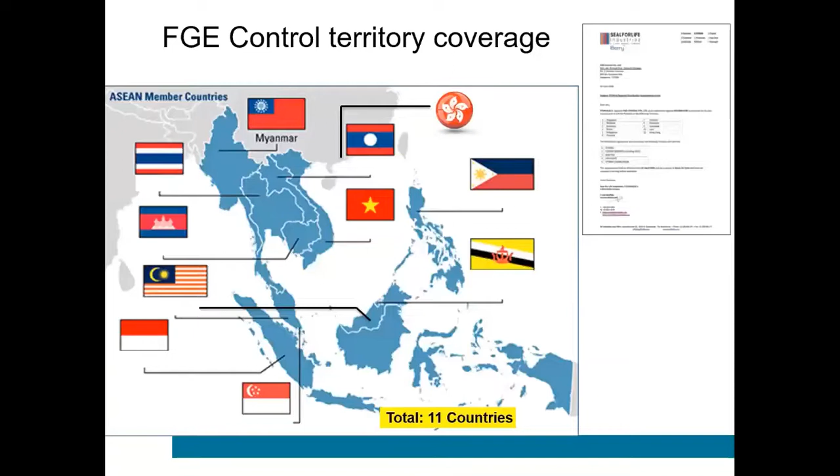So I'm based in Singapore. I used to work for STOPAQ in Europe for about 8 years, and for the past 2 years I've been based in Singapore to look after the Southeast Asia region. These countries therefore also include the Philippines, and we represent STOPAQ as a master distributor for the Southeast Asia region.

STOPAQ itself is part of a bigger company from the US called Seal for Life Industries. This company is fully focused on corrosion protection. They have different types of technologies, for example Polyken, which are 2-ply and 3-ply tapes. They have Covalence, which is the former Raychem heat shrink sleeves. They have Anode Flex, which is linear cathodic protection, and Powercrete, which are liquid epoxies. STOPAQ is part of that.

And now with the new acquisition, you guys are also representing Oxifree, which was purchased at the beginning of this year. But these 5 are the original companies under the umbrella of Seal for Life.

By the way, can we ask questions during your presentation, or should we do this at the end? No, absolutely, you can ask whenever you want. That goes for everyone.

So with regards to all the concerns, actually, I don't know if you still remember me. I've had a meeting with you before at an event in the States, in Texas, with the STOPAQ group of companies, maybe about 4 or 5 years ago. I don't remember, that's quite long ago.

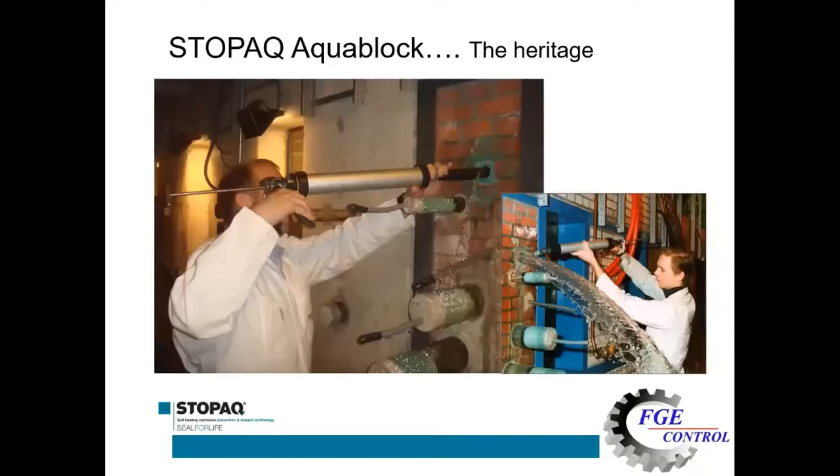STOPAQ stands for Stop Aqua. Why? Because Holland, the country where I'm from and where the technology is from, is actually below sea level. 60% of the country is below sea level, which means we have a lot of water ingress and water problems. So we had to learn to live with a high water table and make sure our buildings are sealed off. This is one of the things Holland is famous for, all the dikes and waterworks we have. STOPAQ in the 80s and 90s was actually a sealing, waterproofing company, and we started with cable duct sealing, which we do for example for telecom cables running through buildings.

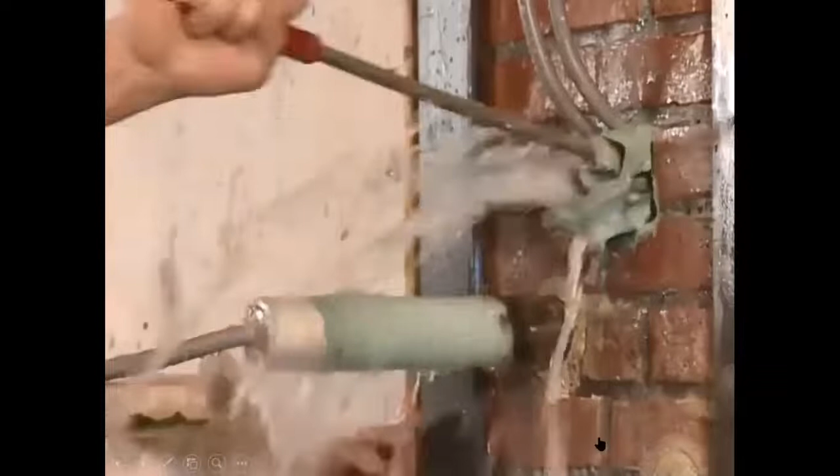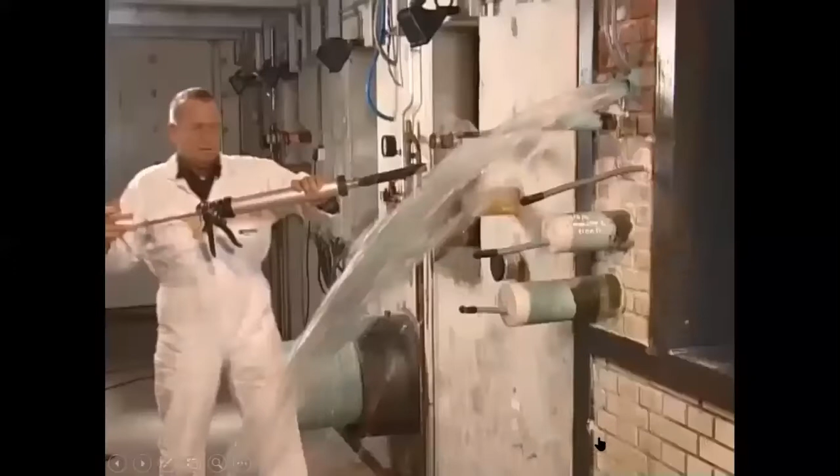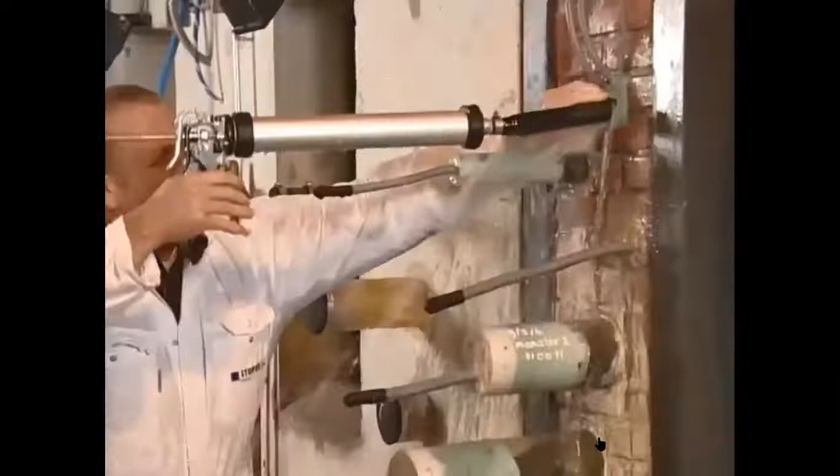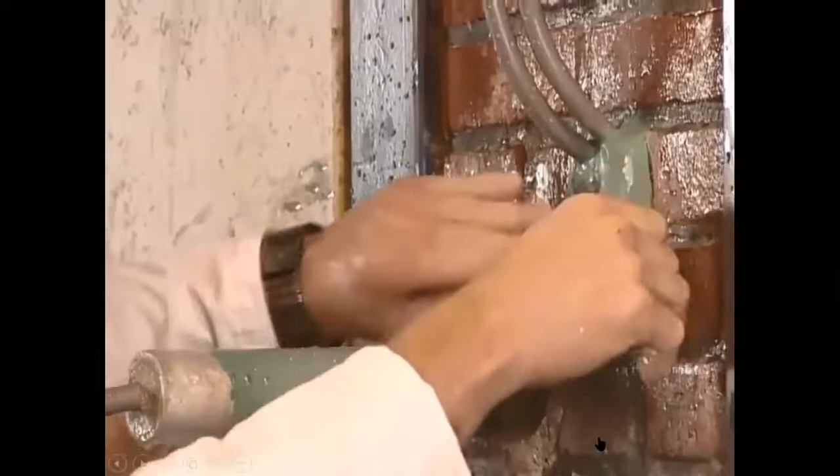I'll show you a little video. This was the first product of STOPAQ. There's a water column on the other side, so there is water pressure. He's just scraping it out right now, and then they inject the STOPAQ, which is here in a cartridge. It swells and stops the water from flowing through. The material itself, and also the corrosion materials, don't cure, which means there will always be flexibility, like chewing gum.

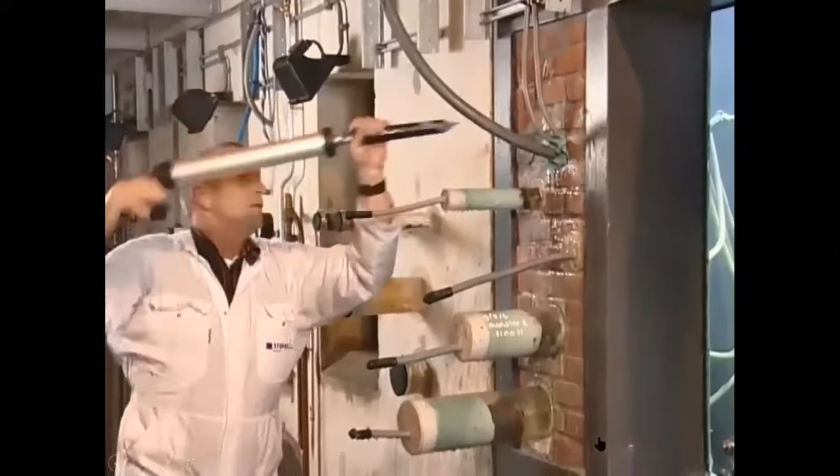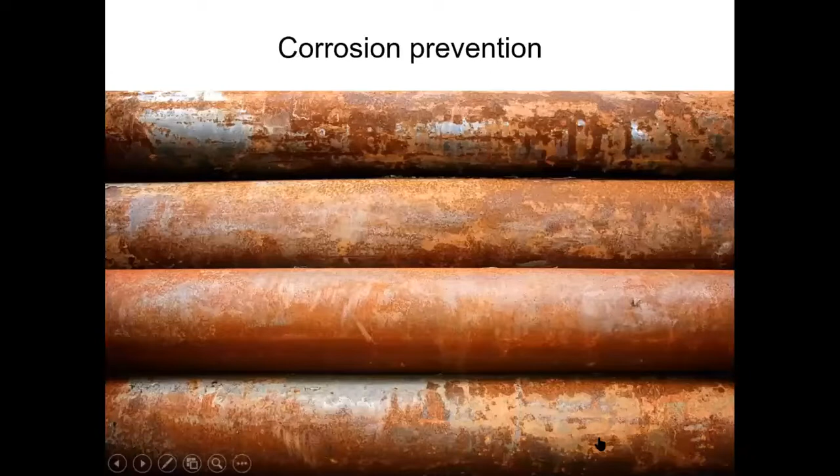So this is how it started in the 80s and 90s. In the 90s, we were asked to seal compressor stations for a gas company in the northern part of Europe because they had a lot of water ingress. There was a joint venture in Holland between Shell and ExxonMobil, and these engineers came, took a look, and said, hey, this material is actually also applicable as a corrosion prevention material. Why don't you make it in a band form, like a tape, and wrap it around our pipes? So that was something new for us, and we started doing that. Now, instead of sealing, our business consists 90% of corrosion protection.

External corrosion, I have to say - we don't do internal corrosion, we only do external corrosion. STOPAQ technology is based on a polymer from a German company called BASF. The polymer is called polyisobutene, and it seals against corrosion and any water ingress. That goes for anything from onshore, offshore pipelines, refineries, petrochemical - anything that is steel that corrodes, we can treat.

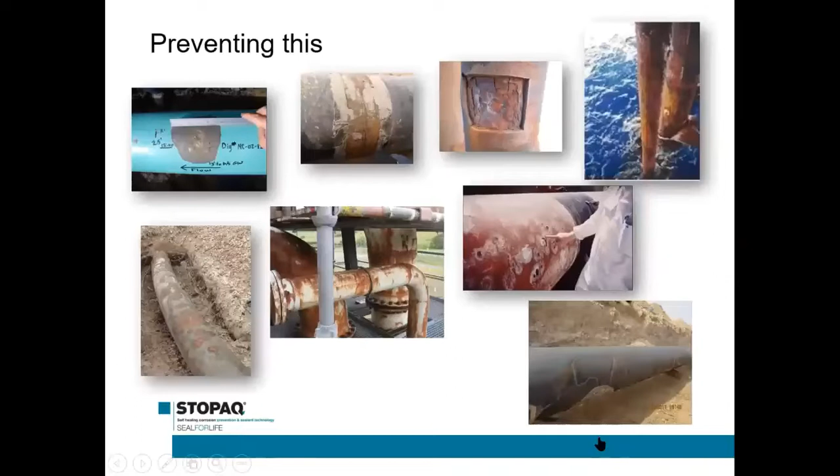The material is used for external corrosion, and mostly what we do is maintenance work, preventing these types of corrosion issues that they have.

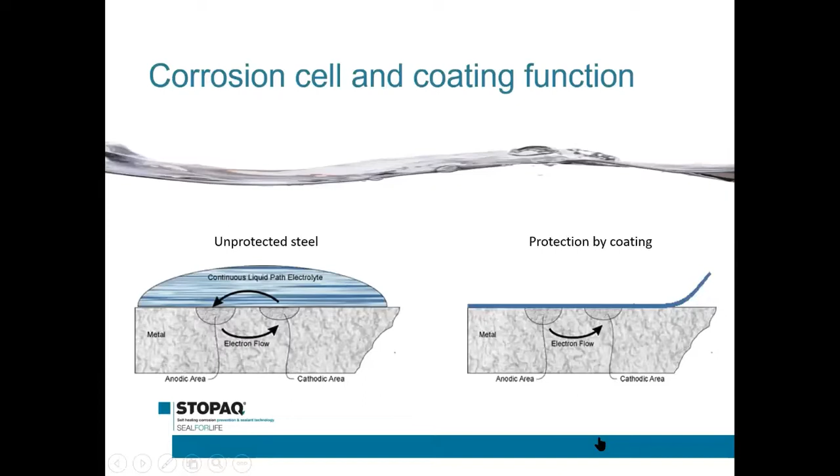What do we do? We are a corrosion protection company. On the left side, you have unprotected steel, and on the right side, you see it's protected by coating. So what is it called? We are called a barrier coating. We protect the substrate - we separate it from the environment, meaning it cannot react with anything that might be corrosive or start the corrosion process.

This is the polymer, polyisobutene. It was already invented in 1935, so it has a long track record. In the 90s, we were the first to get the flow under control, and we have patented the corrosion application. So from BASF, we are the only ones that can use it for corrosion.

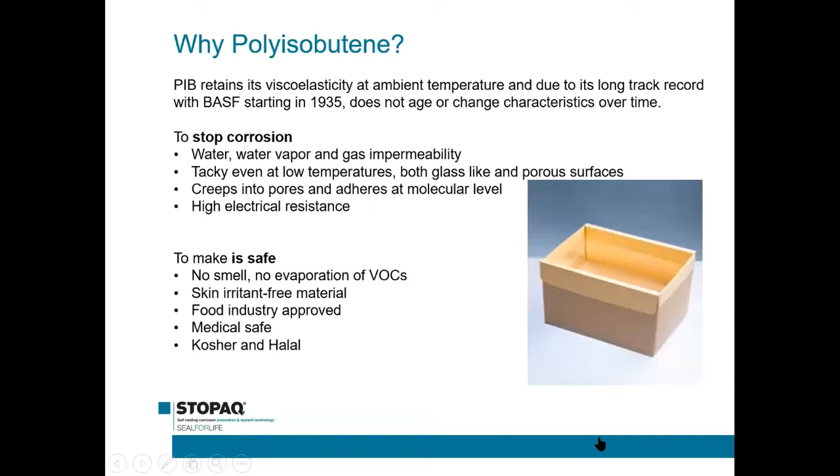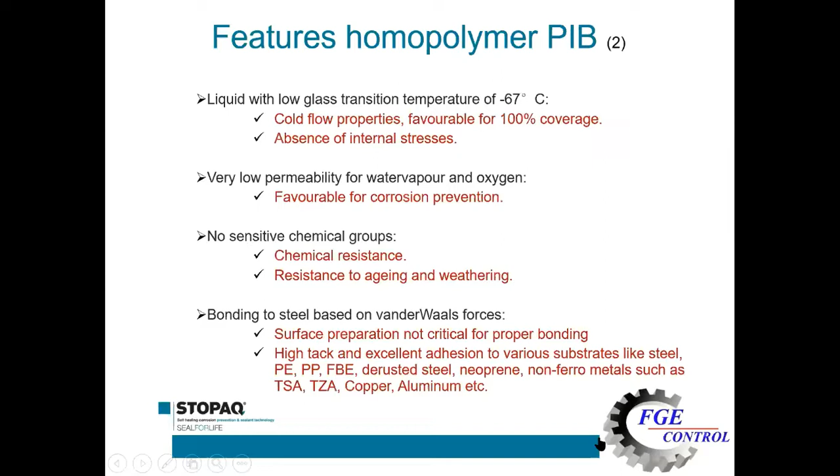It's impermeable for water, water vapor, and gas, and has high electrical resistance, which are all good qualities for a coating. Other than that, you can compare it to chewing gum because it sticks to all sorts of surfaces with minimal substrate preparation. It sticks to polyethylene, polypropylene, fusion bonded, but also neoprene, thermal sprayed aluminium, thermal sprayed zinc, copper, and aluminium itself.

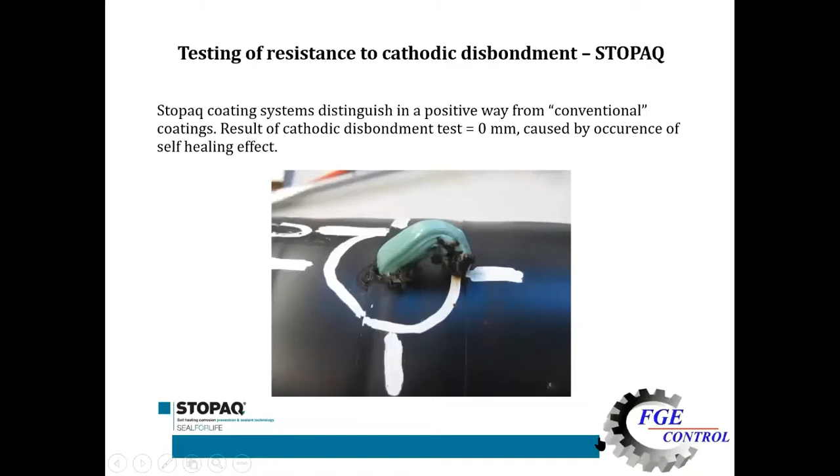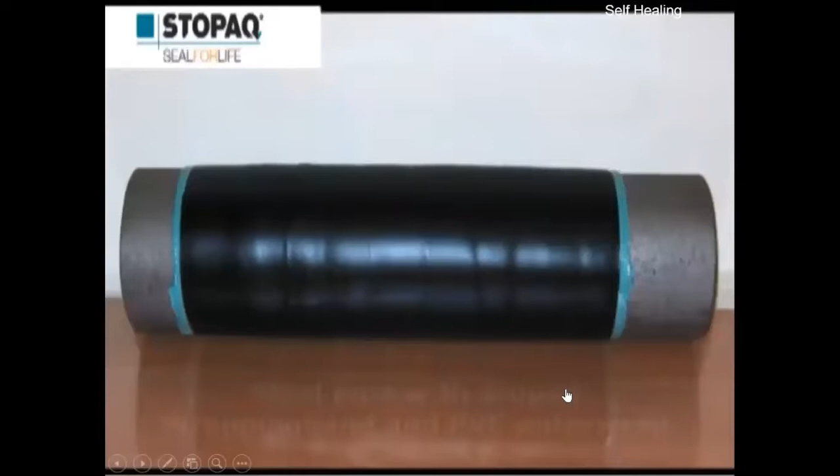One of the advantages of the STOPAQ system is that it is self-healing. The material always comes in two layers. You have the green inner layer directly to the substrate, which is the green layer you see on the outside. Then there is an outer layer, which could be an outer wrap, just a normal tape.

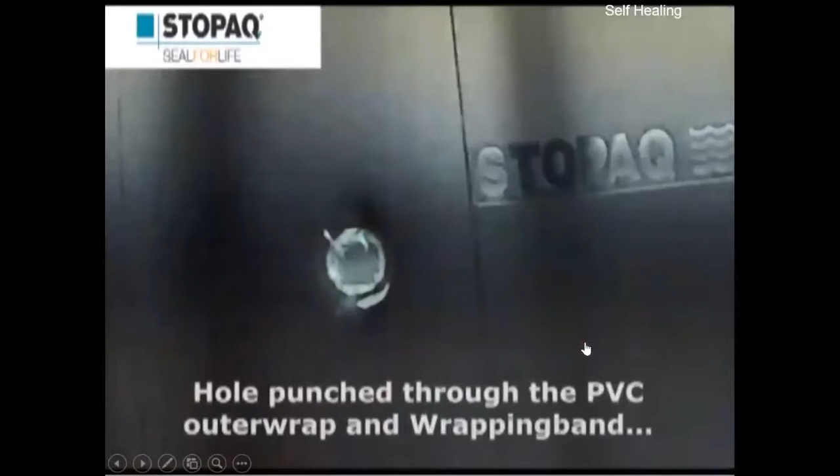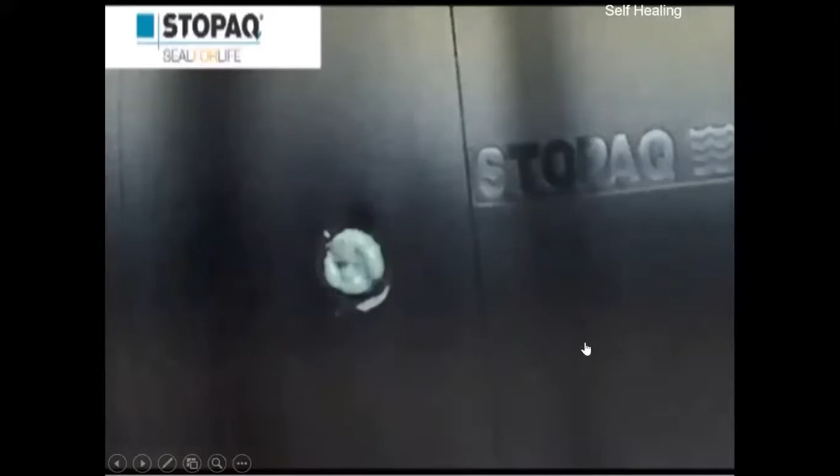This is what we call a coating system. It comes in two layers, the wrapping band, the outer wrap. And we make a hole in this system, and given time and temperature, the material will self-heal itself. This, of course, only goes for small punctures. This is not for diameters of like 20, 30 centimeters - that will not be applicable.

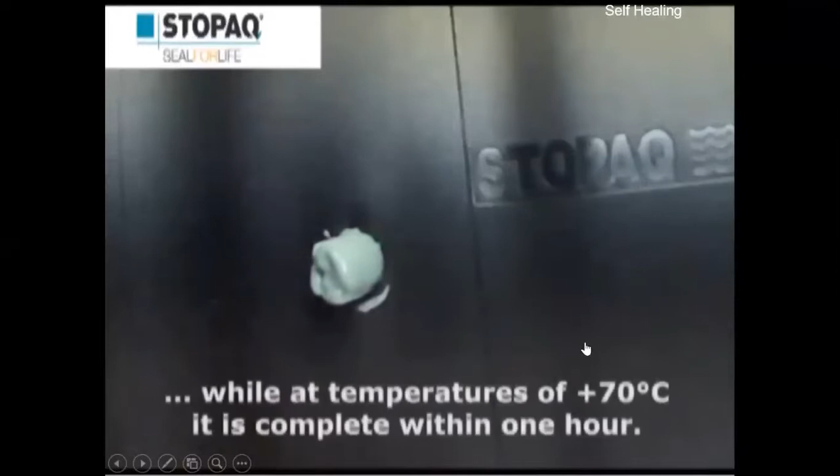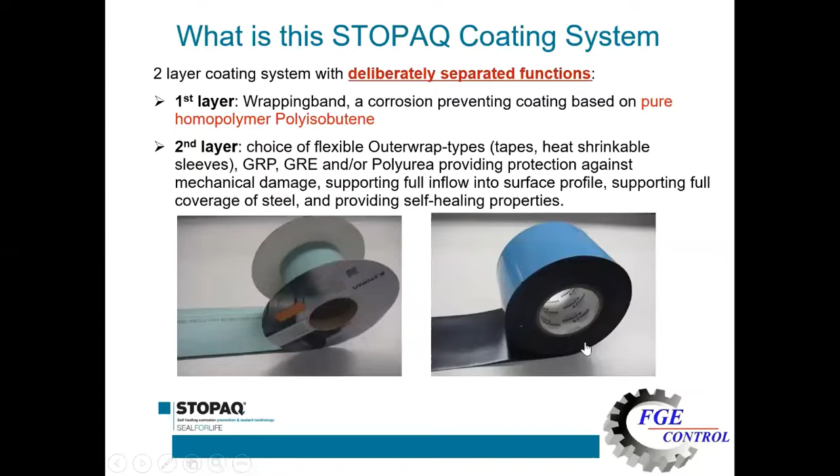As I said, it's a two-layer coating system with separated functions. The first layer is the corrosion prevention layer, that's the green one on the left. The second layer can be a choice, it all depends on the environment conditions. Usually you can use an outer wrap, but in high impact or in soils which are maybe contaminated with hydrocarbons, you can use a glass reinforced epoxy on top.

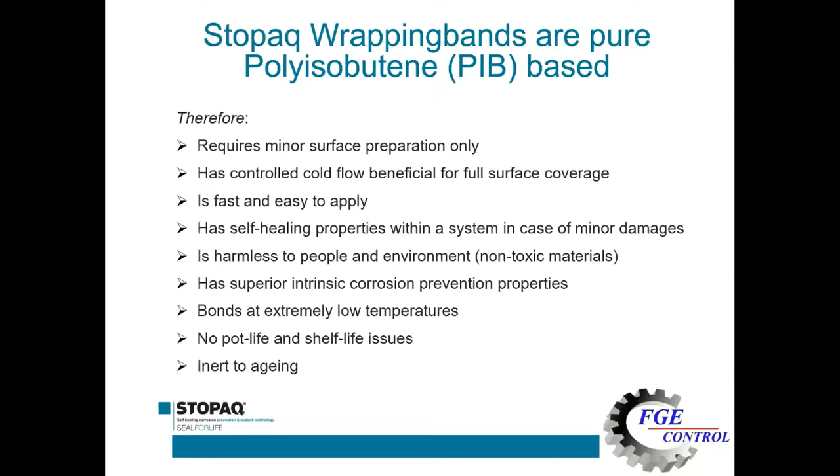One of the advantages of STOPAQ is that it requires minimal surface preparation. It doesn't need blasting, it will do with an ST3 prepared surface. It's fast and easy to apply. There's no curing time, no shelf life, pot life, and it is inert to aging - so it doesn't age. Whether you use it now or in 20, 30, or 50 years, the material stays the same, because it's not like an epoxy where you have component A and B. No, this is just one component and it doesn't age.

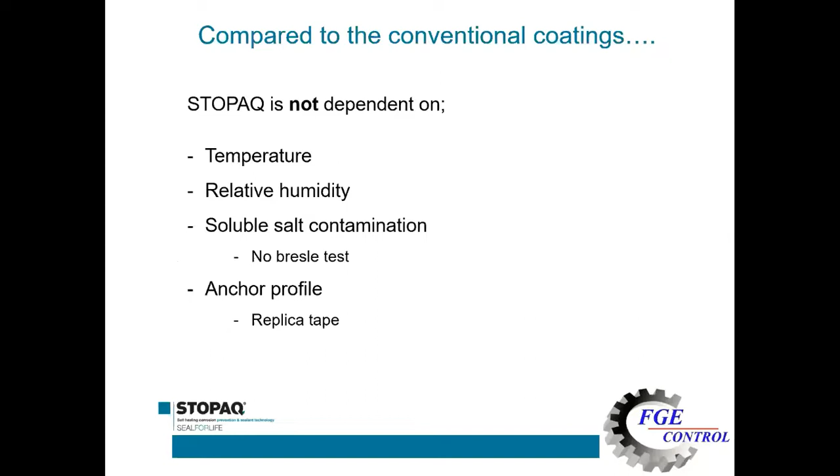Compared to conventional coatings, it's not dependent on temperature during application or relative humidity. There's no need for a Bresle test, and there's no need for an anchor profile.

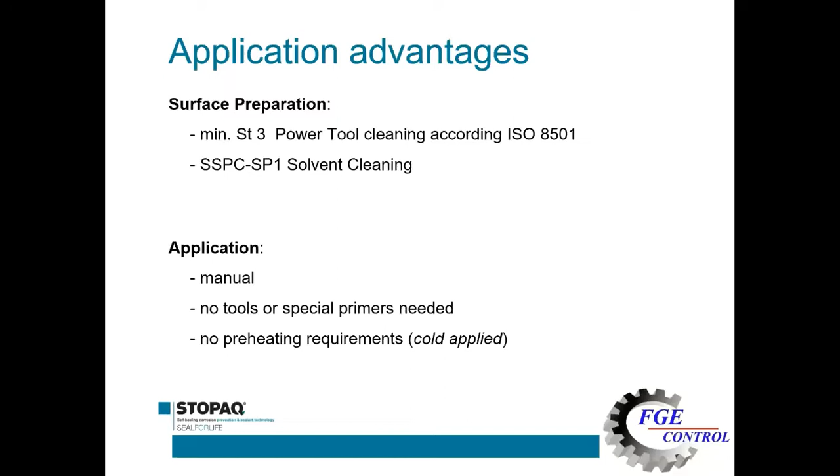Power tool cleaning is necessary, solvent cleaning, and then you do the application manually. Before or after you do the surface preparation and before you start applying, you do a little cleanliness check to make sure that the surface is clean enough.

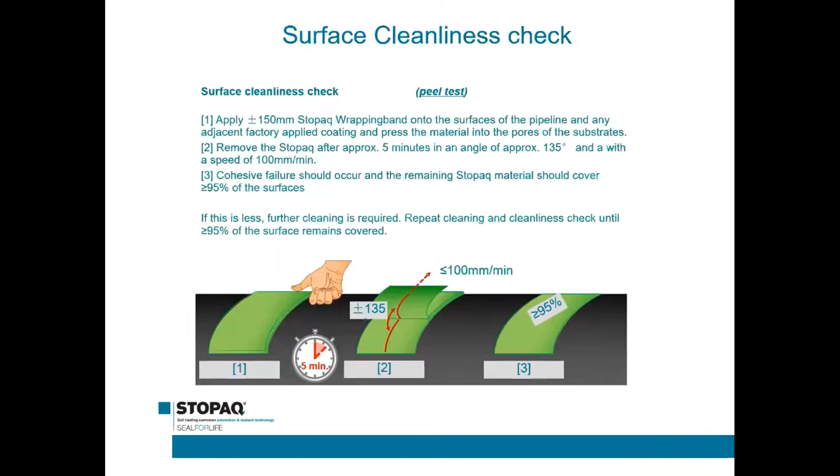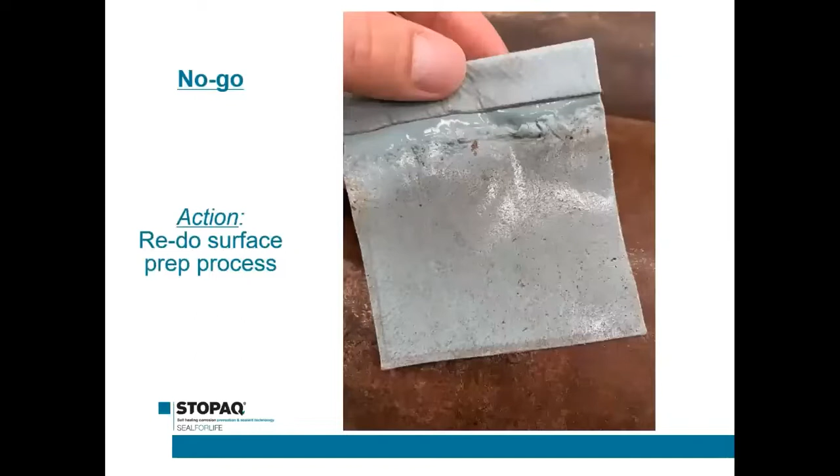You stick a small piece of STOPAQ onto the surface, and you remove it. If it sticks to the surface, this is perfect - that means you can start the application. If you see this, it's dirty and you need to do more cleaning: power tool cleaning and solvent cleaning.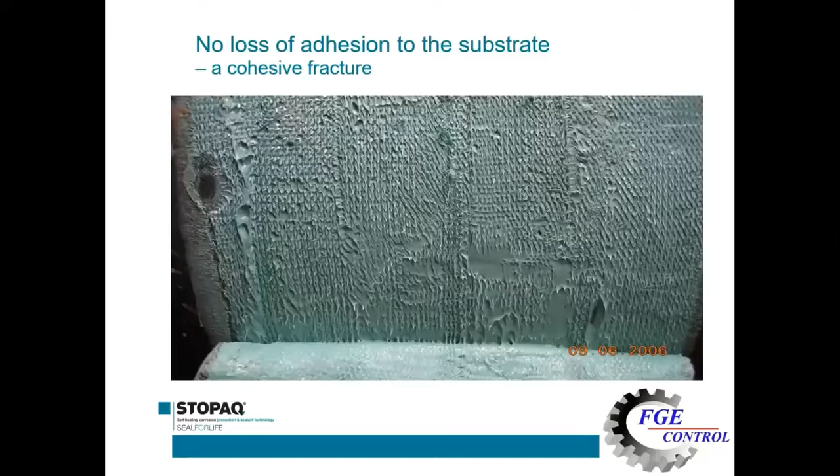So this is what you will see if you try to remove the layer from the substrate - there will always be a sticky layer onto the steel. This will protect the steel surface from corroding.

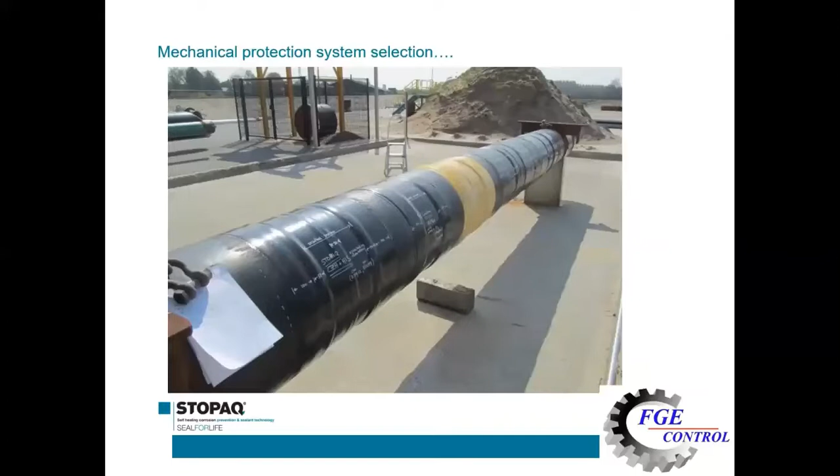The outer layer, like I said, depends on the soil and environmental conditions. Here you see we do a soil stress test with different types of materials as an outer layer - heat shrink sleeve, tape, outer glass shield, polyester - and we try to make the best combinations possible for the longest durability of the total coating system. Soil stress analysis matters because if the pipe is underground, the ground is still moving, therefore the pipe is moving, therefore the coating will endure certain stresses.

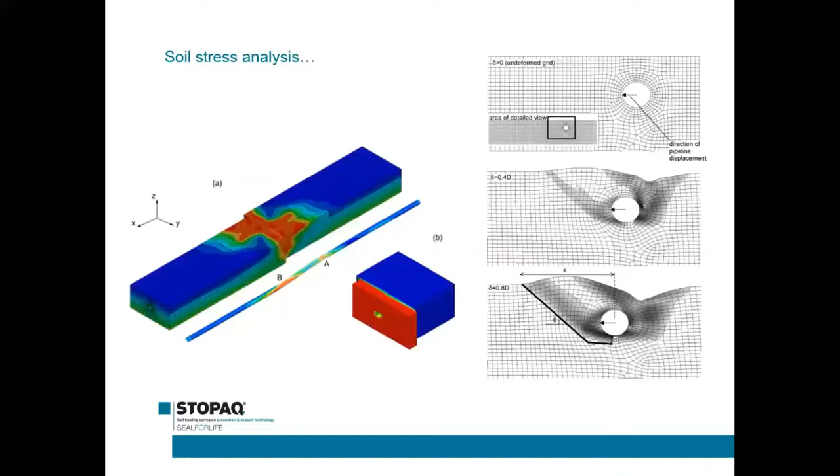Going from here, what we do is, for example, we write inspection test plans, quality plans, we have application manuals, PQTs, PPTs, depending on the project, depending how big the projects are, and depending on what the requirements from the client are. So now we go through some of the pictures.

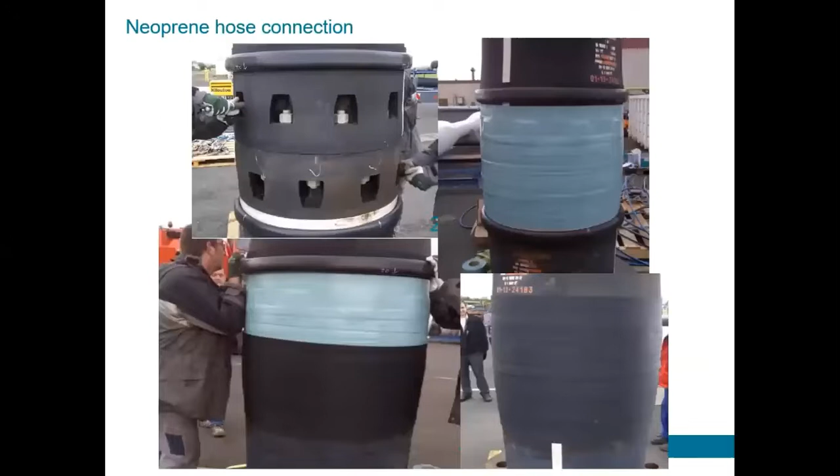It's easy for you to see what the material is used for. One of the things that is very unique for a coating is to be able to stick to neoprene. For STOPAQ we can. This is a connection hose offshore where we seal the connection points.

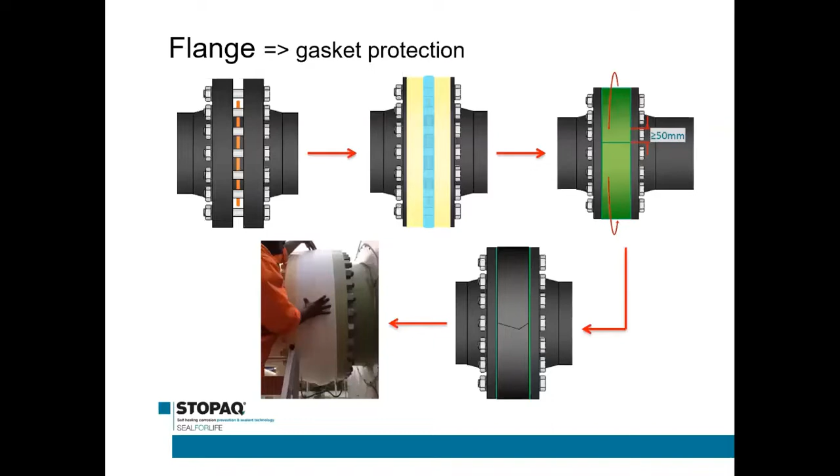Flange protection, you seal the gasket in between the two flange faces. Structural steel, we apply the green layer on the structural part and we top coat it. So this is no outer wrap, this is where you use a paint on top of the material. This is the finished product.

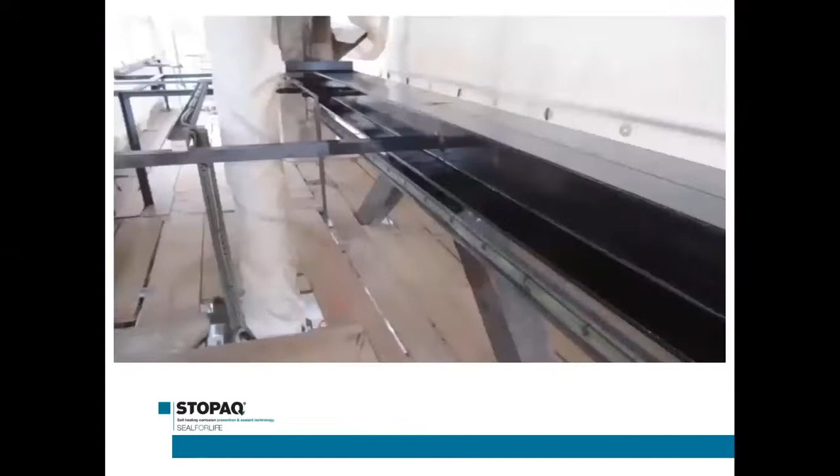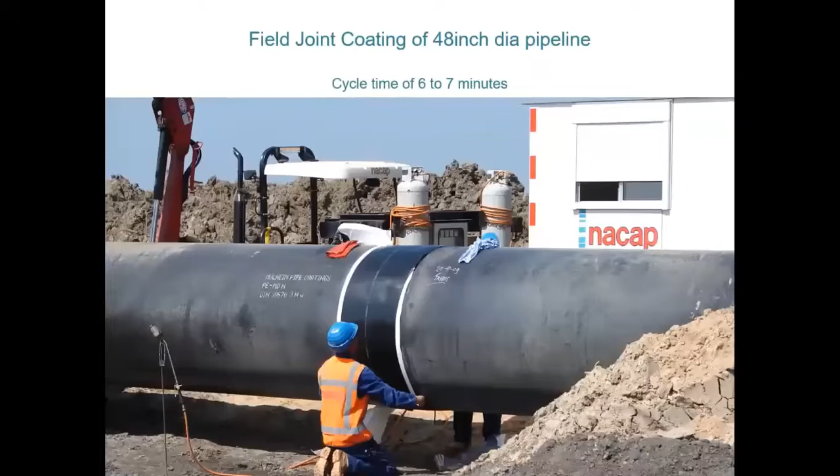Underground storage tanks, applied with the green layer first and then a black outer layer. And we do field joint coating.

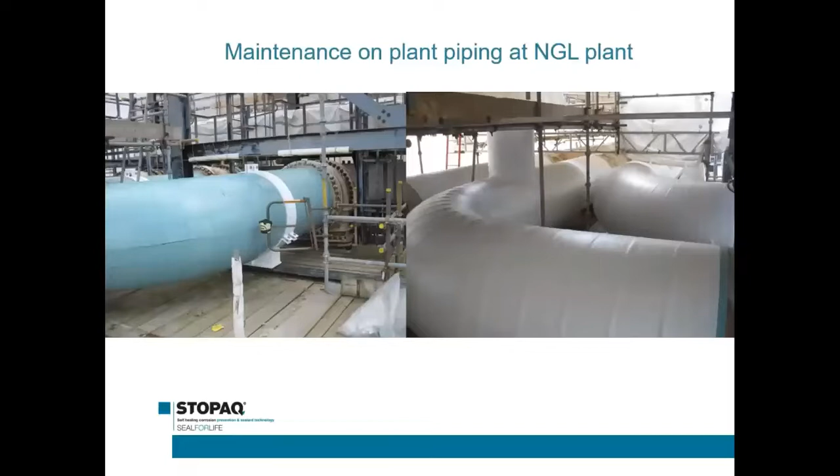We do maintenance on, for example, above ground structures of a plant. So you see on the left the green layer, and this particular client wanted to have a white colored outer wrap.

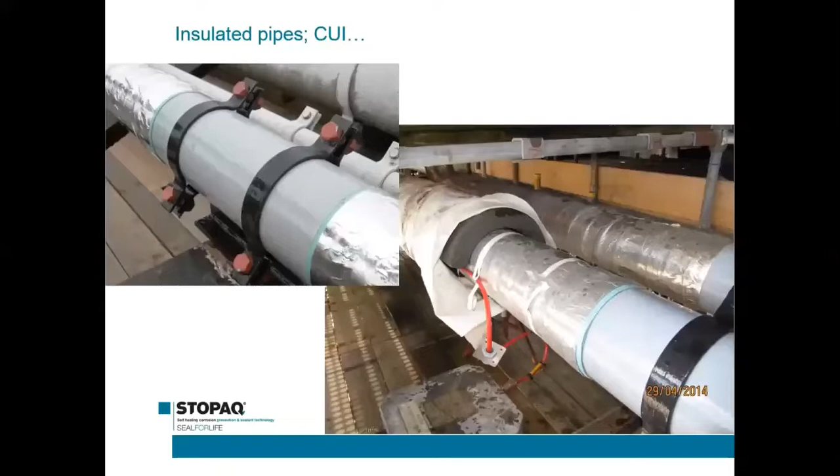We do pre-insulated pipes, which you either do over insulation or under insulation. Corrosion under insulation, that is called CUI. Here you see over insulation. This is actually in the Philippines, Phoenix Petroleum.

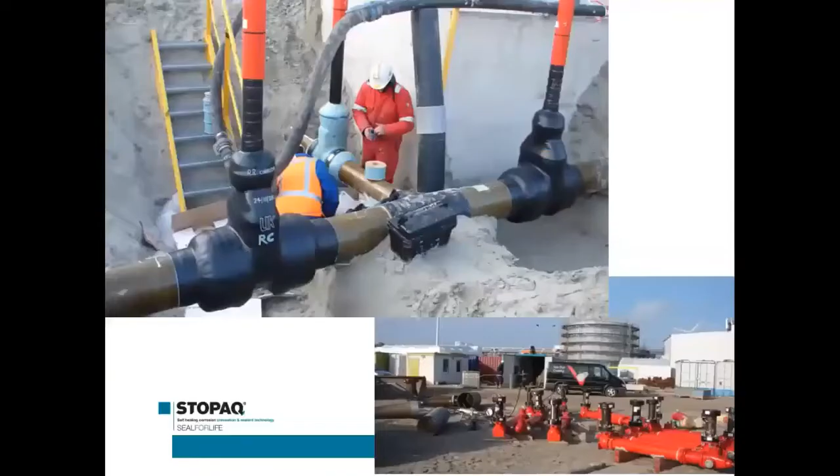Underground valve protection. There's a lot of irregular surfaces, so the STOPAQ material is very flexible and easy to mold around all these irregular parts, and you can fully wrap it where you see here. The green is already underneath. This is the black outer layer.

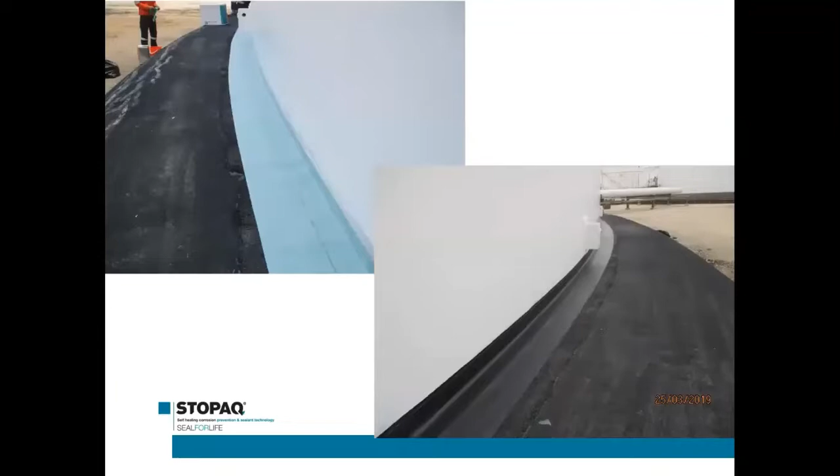Tank chime, which is this is a big storage tank. So what we do is we seal the bottom plate so that there can be no ingress of water underneath. Risers, soil to air transition area. Then the riser, you go from below ground to above ground.

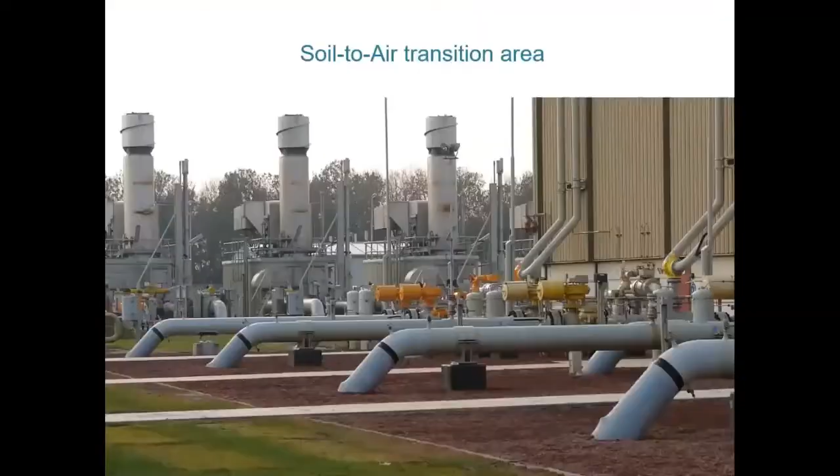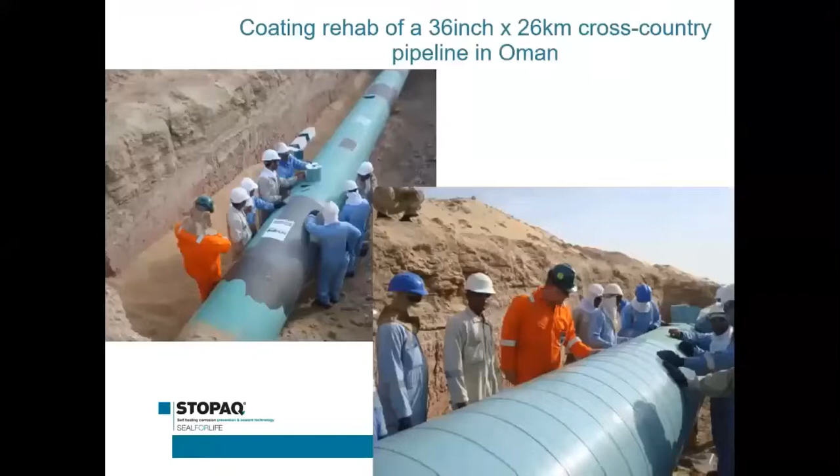Normal straight pipeline rehabilitation. You see here long stretches, 26 kilometers. This one is in the Middle East. Saudi Aramco does the same thing. It's one of the contractors you see here.

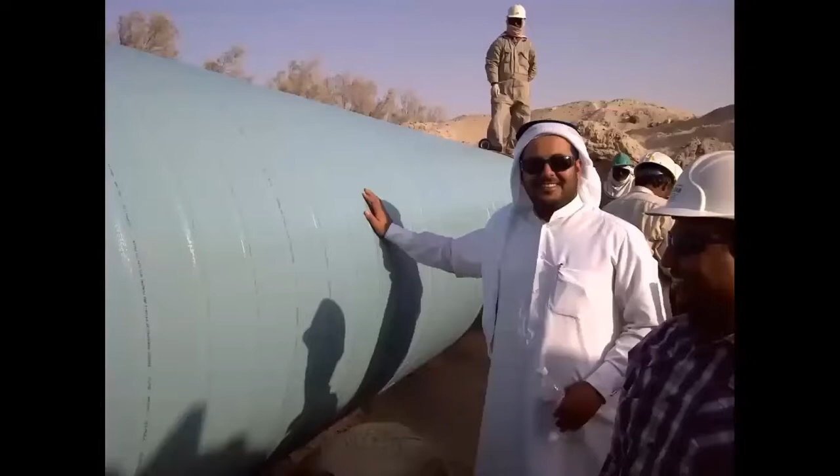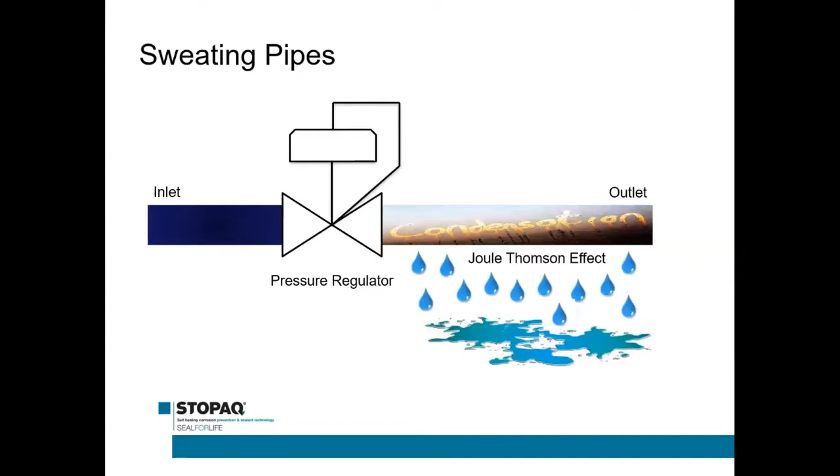Sweating pipes. There's a lot of condensating pipes, especially if the medium through the pipe is cold, like gas for example, and you have a humid or warm environment. The pipe starts sweating. You can coat it using a shutdown of the whole plant, but for our material it's not needed. We can apply it onto a wet surface.

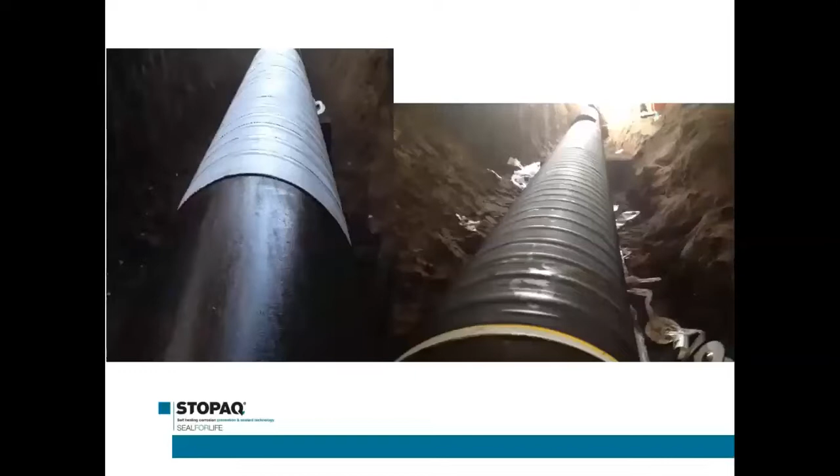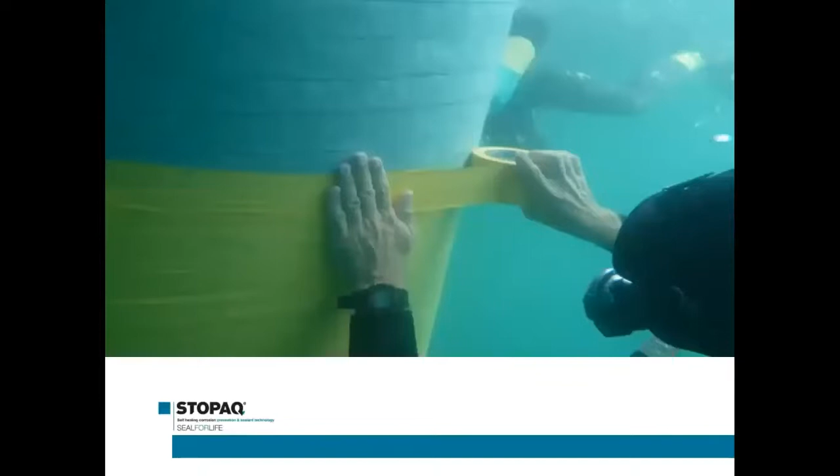This is in Chicago, in the US. There's also a sweating pipeline. There's a tunnel part. We use it also for subsea coating and jetty piles like this. You see here in Brunei.

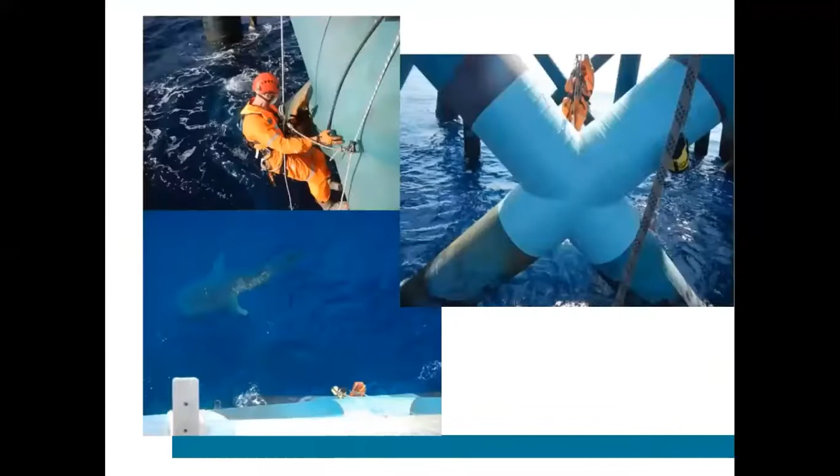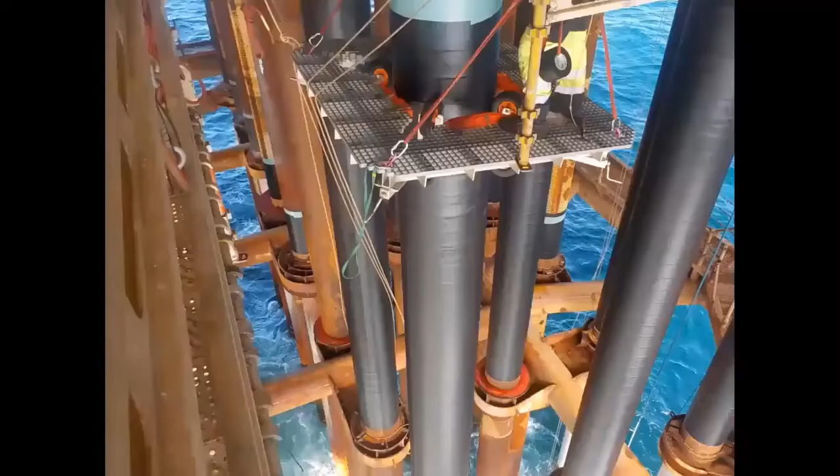They also use it for a jacket leg. There's an offshore platform in Australia where they do it by rope access. They apply it. These are conductors on a platform in the North Sea. They apply the two-layer system.

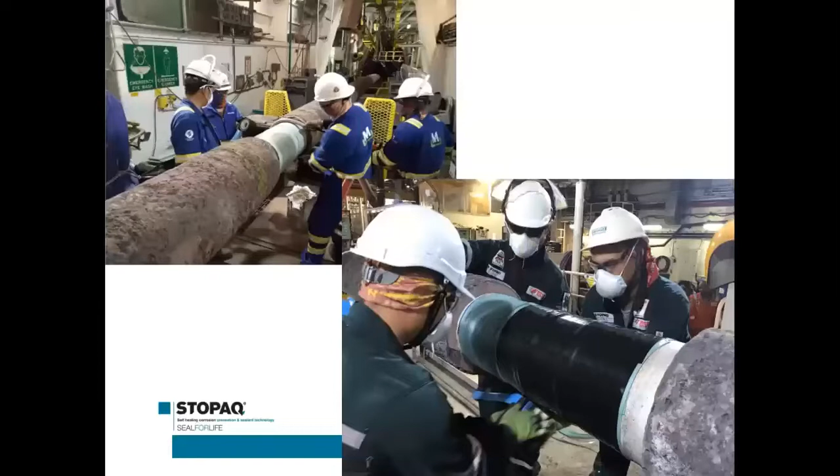Some specials that you see here. This is actually a video that just came by. It's similar to this, it's offshore field joint coating. It's on board of a ship, so they do pipe lay, and they coat the area.

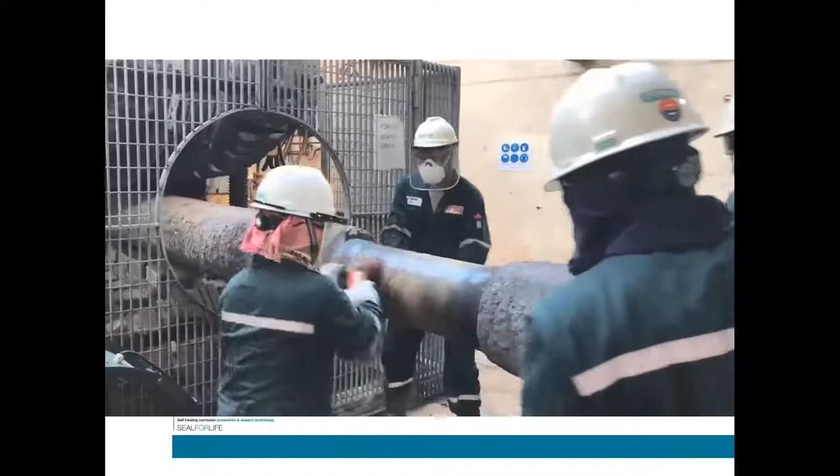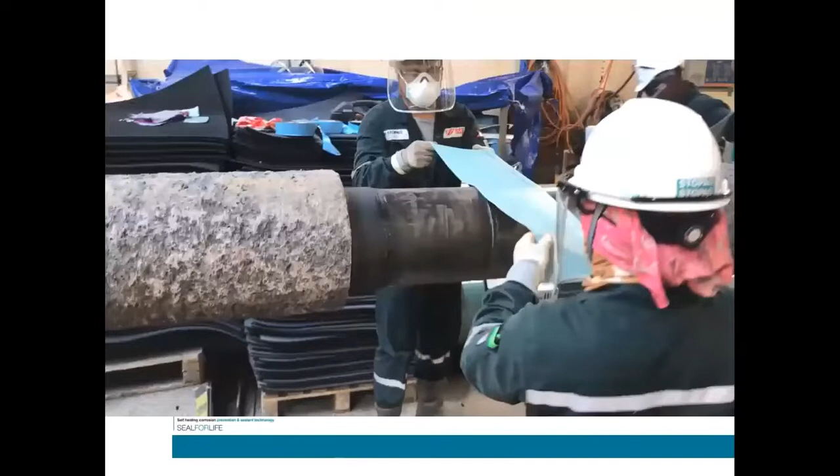I'll have a video here. So they do surface preparation, solvent cleaning. And then this is the first layer. The green materials are the first layer. So the cutback here is quite big, so they need 4 strips of the first layer to be applied.

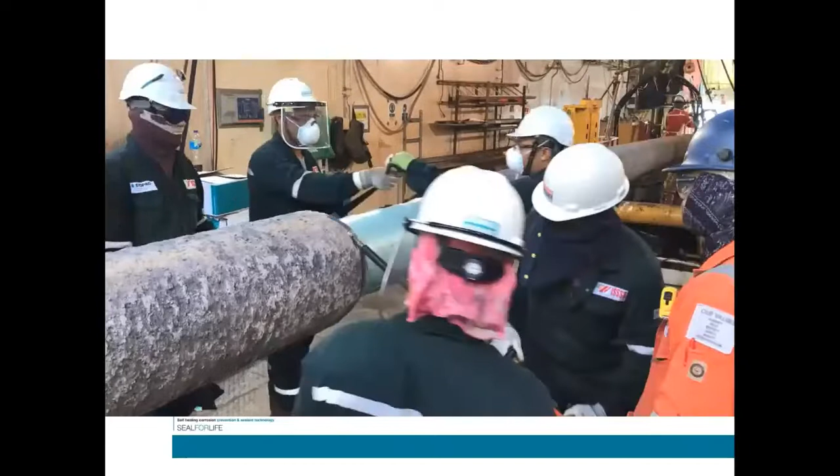So after this first layer, you do the holiday test to make sure that there are no holes. Then they apply the second layer, which is the outer wrap.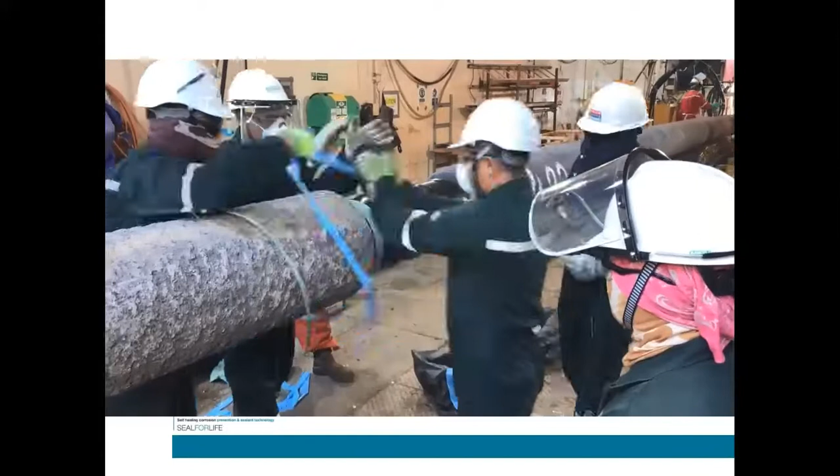And then usually this is already the total system, but for offshore, they use an extra layer, which is this one. This is the rock shield. This is rarely used onshore. This is just to fill up the void between the coating and the gray cement layer, or concrete layer, sorry.

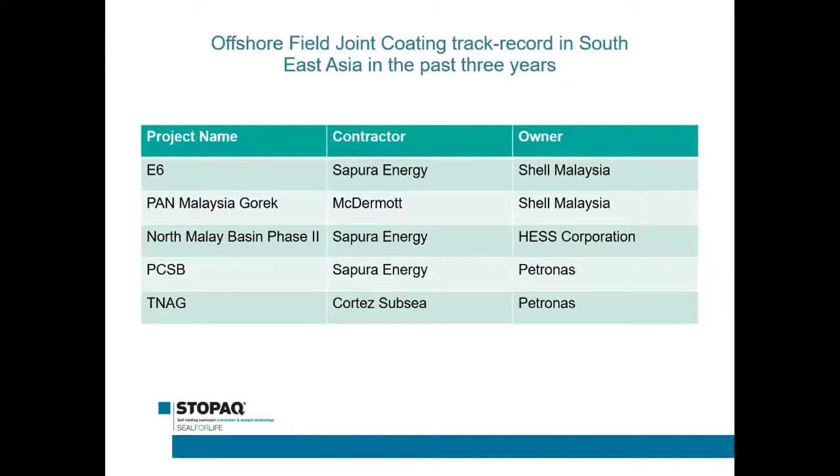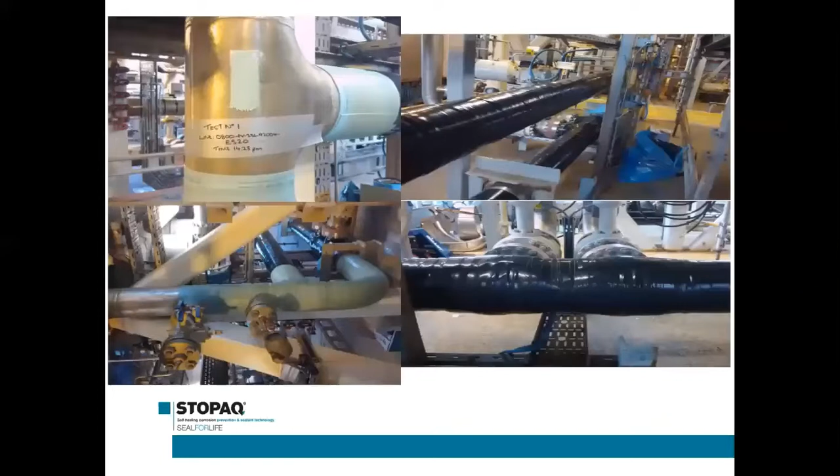Some of the offshore projects in the last three years that we've done here in Malaysia. Stainless steel applications that we are going into, especially for Woodside in Australia. Some more applications here, some T-joints, some flanges, and just straight pipes.

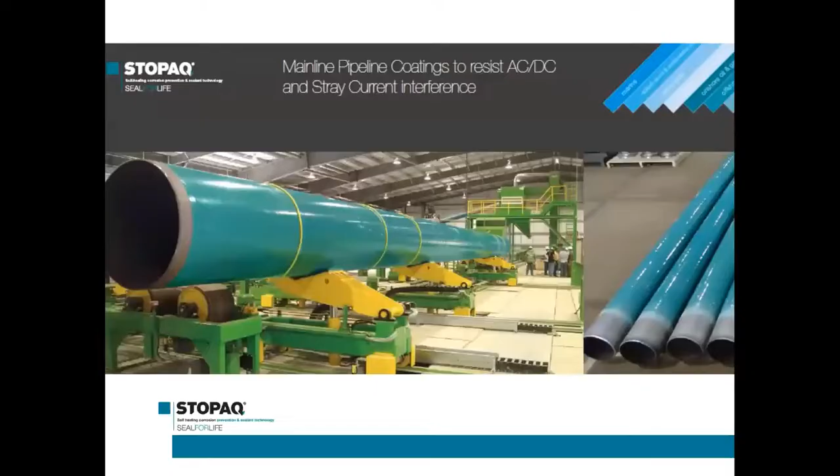We also have a mobile coating plant for line coating here in Singapore and in Malaysia. So what we do is we coat pipes on site. So actually it's more like a pipe mill.

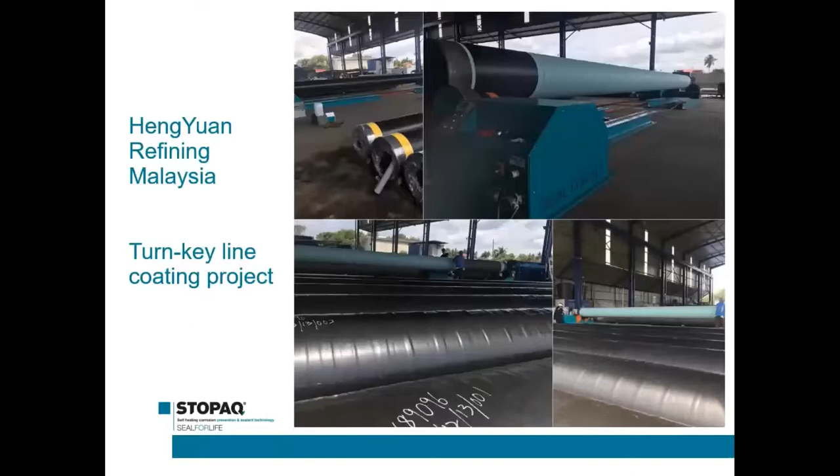This is one of the projects we've done recently in Malaysia for an upgrade on a refinery. They wanted to have more pipes ranging from 2-inch to 30-inch. And we coat them on site with a 2-layer system. We ship it to site, they weld it together, we do the field joint, and they start the operations.

This is what it looks like. So you see here, the black outer layer is just a normal polyethylene outer wrap. And this light green is the glass reinforced epoxy.

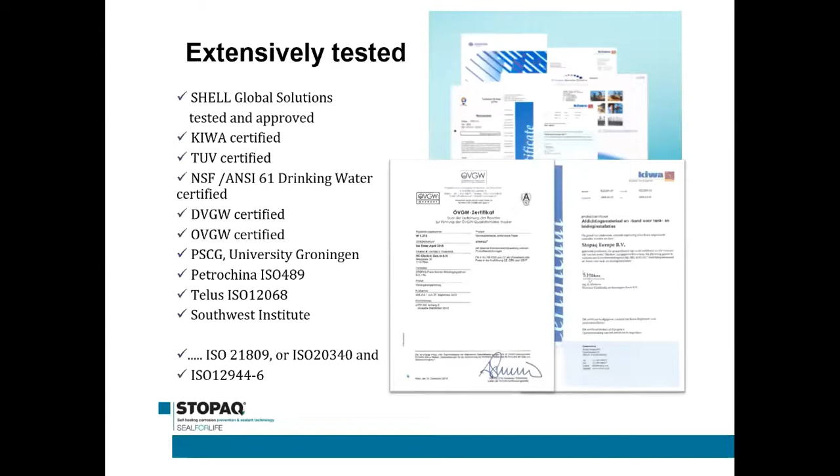So this was actually, in brief, the presentation on the technology. Does anyone have any questions?